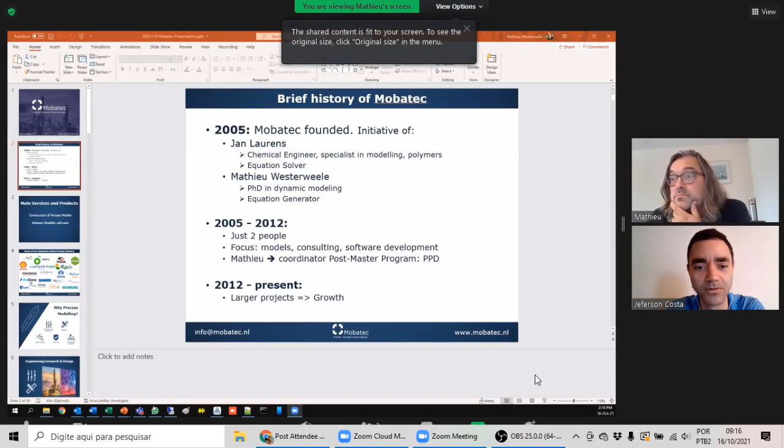It was very interesting because I received a question about my point of view on colorblind people getting a job as a chemical process engineer. It wasn't only one person, more than one person asked me the same week, so I decided to share something to see if I could help with that.

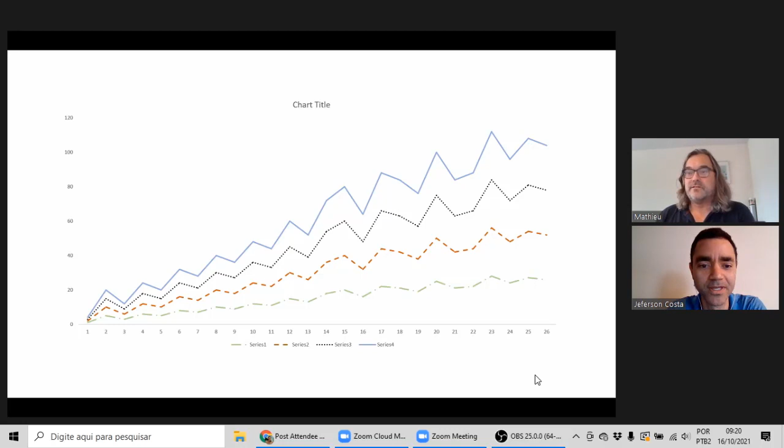How did it impact your studies and your career? No, hardly, because my study isn't about colors, and I didn't do any chromatography studies or something. I focused on process engineering, most of which is rather black and white, so to say. So it didn't impact that much, and when things with colors were concerned, I typically asked somebody else.

Also, people talk about navy green or whatever, all these additions - they make no sense to me. It's green or not.

I received some questions if it's possible to be a chemical process engineer having color blindness. You mentioned you did training for operators - did you notice that's something that should be important to a non-colorblind person when you did the training? How was it?

No, typically these operator training consoles already take care of that. I think people thought about these things, and there are real differences in colors. So I don't see any issues there, actually, because I did the training myself.

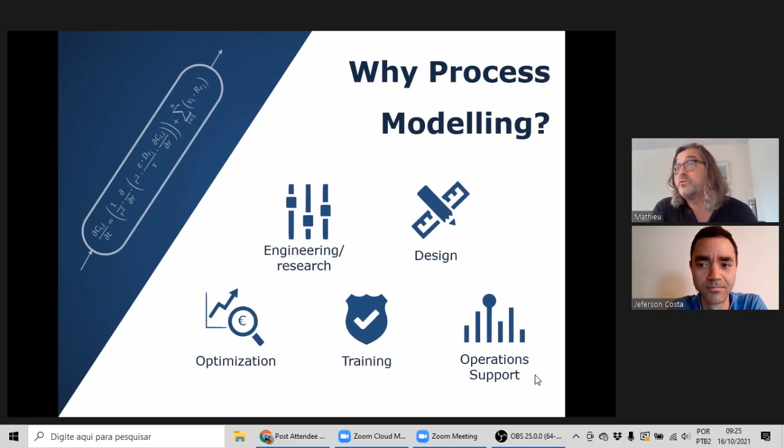In the beginning, we were actually focusing on engineering and research, because as I told you, we were only 2 people. So we worked a lot for companies called SABIC and DSM, which were very close by. At the moment we started, I actually lived quite close - it was 4 kilometers, so I could ride my bike to the company, which was great, and we could do some stuff there.

We typically did research modeling, so you took one unit operation and really zoomed into that, and you wanted to know all about it, expand your knowledge, improve the processes, and debug stuff.

Obviously you can also use it to optimize, so to reduce downtime or to make more product, or reduce cost, etc. These are typical things, engineers know that.

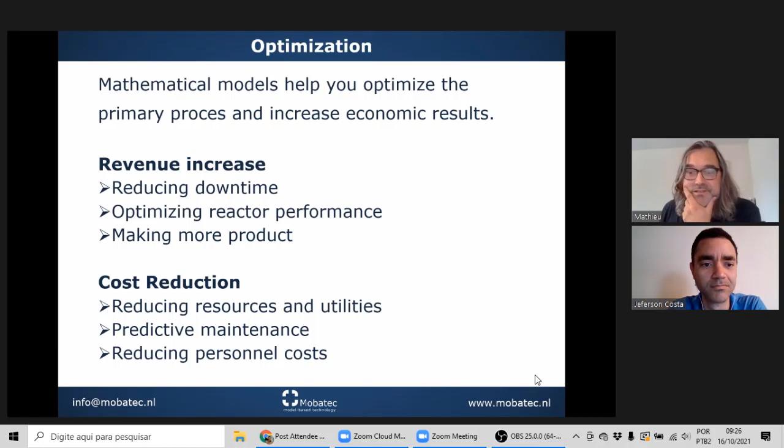Before we started, you asked me to give two examples, so I thought let's include a few which we did over the years. This one is nice.

These are examples for dynamic modeling, because at MOBATEC we focus really on dynamics, where time is also very important. Steady state simulators, there are a lot of them, and they started in the 1980s - you have Aspen HYSYS, which are combined nowadays, Pro2, Unisim, I don't know, there are a lot of those.

DWSim is a nice freeware one nowadays. I talk to this Daniel once in a while. Daniel is a Brazilian guy, very proud.

He's the Brazilian guy, but he hasn't been on your talk show yet, or has he? Not yet, not yet, he's the next one. But he's actually doing still a full-time job, so he does that all in his spare time. It's impressive what the guy did. Quite impressive, for sure, very impressive. But I think he focuses mainly on steady state modeling, though he does some dynamics at the moment as well. But well, that's nice, and I made my living out of it actually, which is also nice.

So this was one of the examples. I think it was already 7 or 8 years ago that we did this project. There was a company who had several processes in their plant, and one of the processes generated heat, about 24 megawatts, something like that.

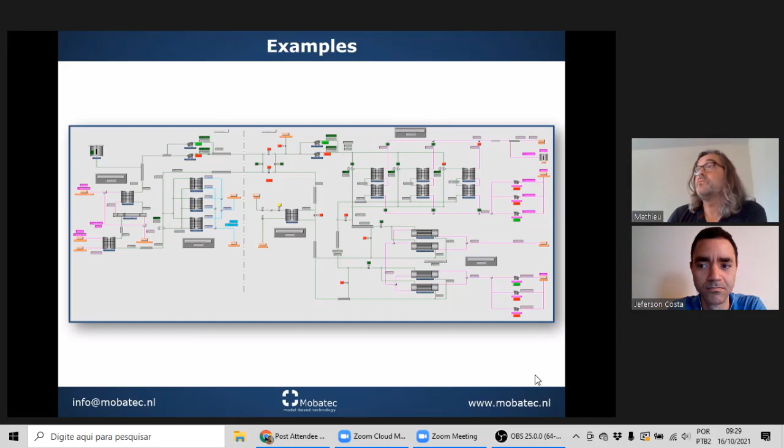So there were huge pipelines with 70 bar G steam. But at some point they thought, let's invest in our own steam boilers and put them on premise. The downside of that is that the distances are becoming a lot less. So if something goes wrong, the pressure in your steam headers will drop way faster.

So once again, steady state, everything is fine, but there are dynamic transition periods, and maybe during the transition your pressure drops so much that part of one plant will trip, and because that part trips, another part will trip, and then you get this whole series of things going wrong. They wanted to be sure that something like that would not happen.

So we built a big model for them with all the steam headers. This is the main picture. Actually, you could zoom in to the user plants, and there you could see all the equipment that uses steam, and you could turn off and on all of them.

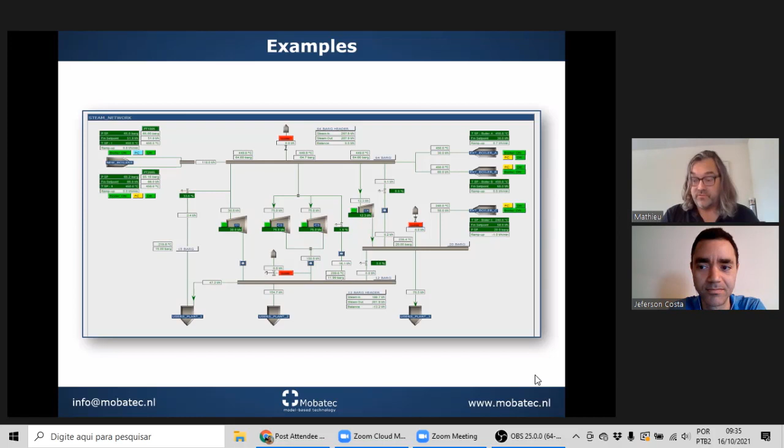It's a good bridge to our next part, because about 10 years ago we started doing more and more training simulators, especially because in the Netherlands most of the plants here were built 50 years ago, and in the beginning there were lots of disturbances and a very low degree of automation. As a result, the operators had a lot of hands-on experience, so they had to start and stop all the time, and they knew how their plant reacted.

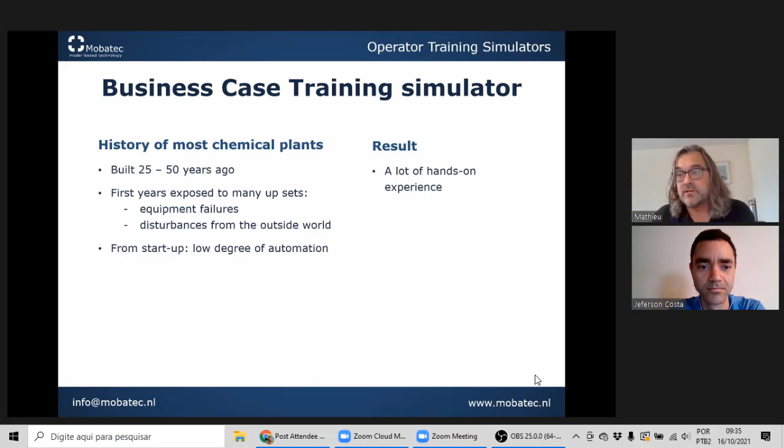But then smart people started doing smart stuff, and you get a lot of smart operations and less disturbances because there is a high degree of automation. It's not only process control, but very often also advanced process control. These are controllers controlling the controllers.

So in the end, several plants, also here in the Netherlands, run stable for 4 years. So the job of the operator sitting inside is, well, everything is running stable. That's fine. The problem is when something goes wrong, you don't know anymore how the thing is going to react dynamically and what you have to do.

So you need training. It's quite similar to the aviation industry. A plane goes from A to B, nothing happens.

99.99% of the time, it's all okay. But if something goes wrong, then you wish that your pilot has followed the simulator training in which he has trained how to handle the plane in this situation. And that's the same for operator training, and that's the business case we have.

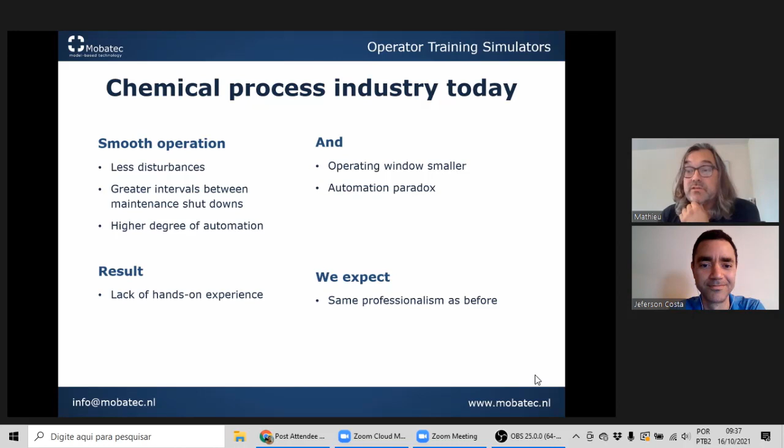So that's also brownfield, and you see that a lot for all the plants that have advanced process control, that they really want to train their new operators, because it's a problem, especially when the experienced operators are retiring. I've seen several times in the Netherlands that they actually need to call retired operators because they don't know how to start up the plant anymore. And because the experience has gone and left the company, you really need some training there.

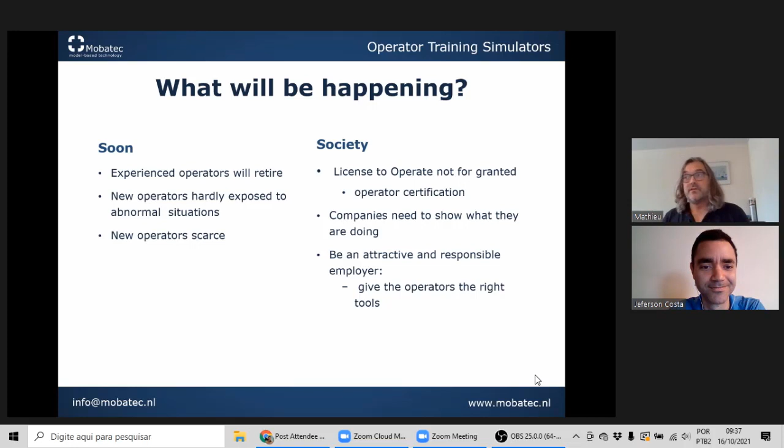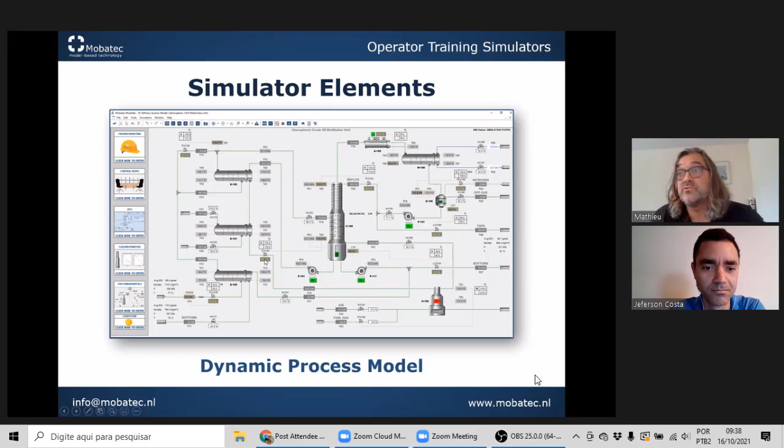So what we typically do is we take the P&IDs of our customer and we rebuild that, so this looks exactly like the P&ID they have. And it's typically a set of P&IDs that are all interconnected. The only difference is that it's now dynamic, so with your mouse you can turn off and on the pumps, and you can open and close valves, etc.

And then typically we connect this to a copy of the DCS, the control system. We have experience connecting this to Honeywell, to Yokogawa, to Emerson Delta V, to Schneider Electric, ABB, Siemens. So what you see here is a DCS of one of our customers, and these screens are from Emerson Delta V. In the real control room, they have 8 screens with Emerson Delta V, and this is the simulator room, also Emerson Delta V. So the look and feel for these guys is exactly the same as they would have in the control room.

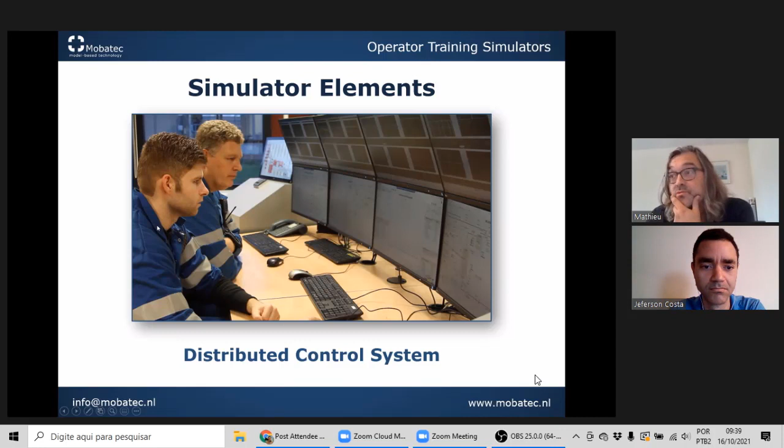And what you often also see in a control room are these annunciator panels, these hardwired panels with emergency buttons and maintenance overrides, etc. What we typically do is we take a photograph of those and put them on an LCD touchscreen. So if you push with your finger the button, you see visually the button going up and down, and the lights will start flashing, etc., as in the real plant. But we only need a photograph, so it's actually a cheap solution, but it does exactly the same thing, and it has the same typos as in the real plant, since it's a photograph.

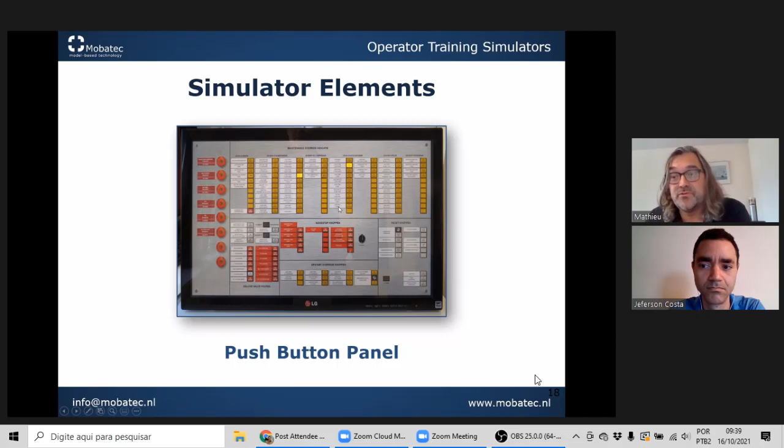And the only difference between an actual plant and the simulator is that we now also have an instructor panel. The instructor can load scenarios and let stuff go wrong and see how these people are reacting to that.

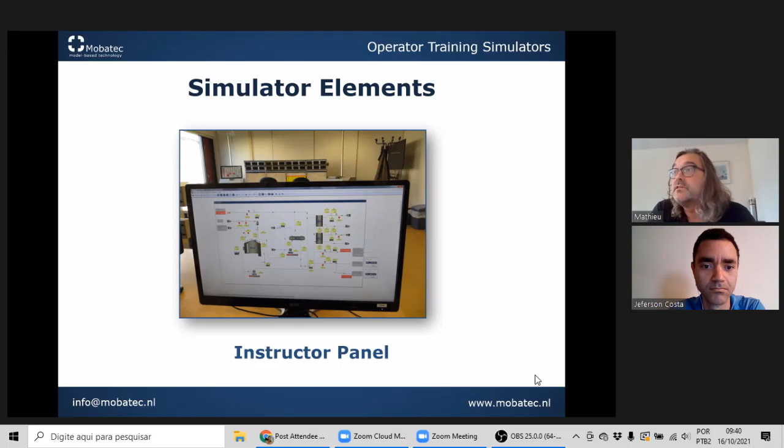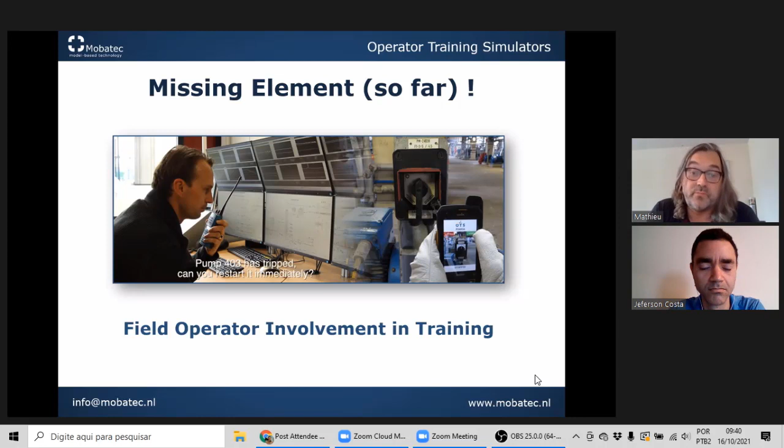So that's very nice, and then we made one extra step. There is one missing element in a training simulator, because a normal plant is operated not only in the control room, but also in the field. So you also need field operators who are operating stuff. But since we now have a virtual plant, you cannot walk in that. What you typically see is that the trainer pretends to be the field operator. So when these guys say, well, pump 403 needs to be started, he waits for a while and then clicks here on the button and the pump starts. But it's not really realistic, of course, and he can start a pump that is 750 meters down the line just 2 seconds later.

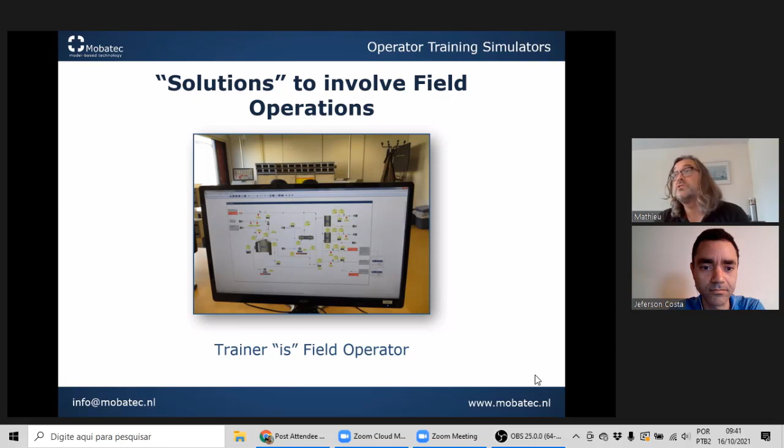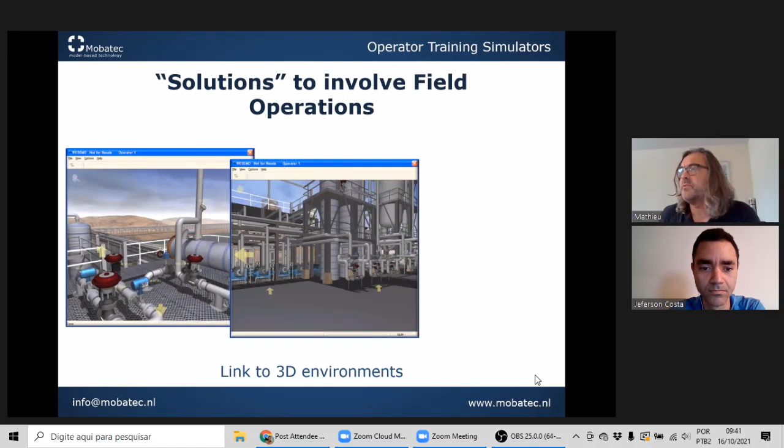So what you see now are these 3D environments. You can put on these virtual glasses, you maybe have seen it. It's really realistic nowadays and impressive, so you can walk virtually to a plant. But that's still a bit of serious gaming, and if you have these virtual glasses on your face for 3 hours because the training takes that long, that's a bit much for most people, and you get a bit dizzy after that.

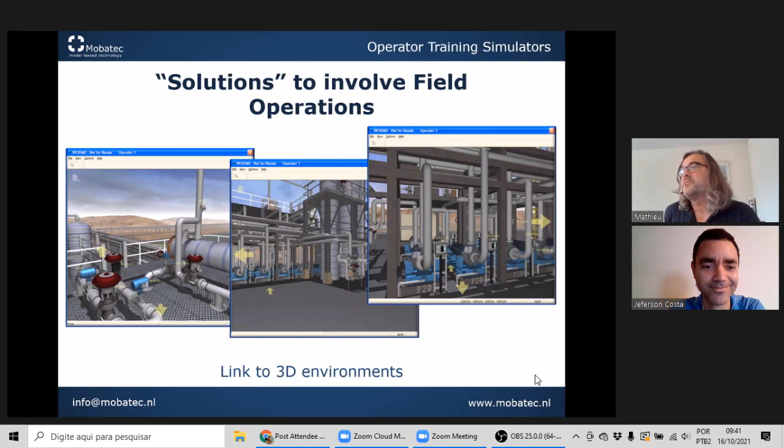We can even do that with photographs, by the way. So then if you click on the button, you zoom in, and you can click again, and then the next picture you see is that the valve is opened.

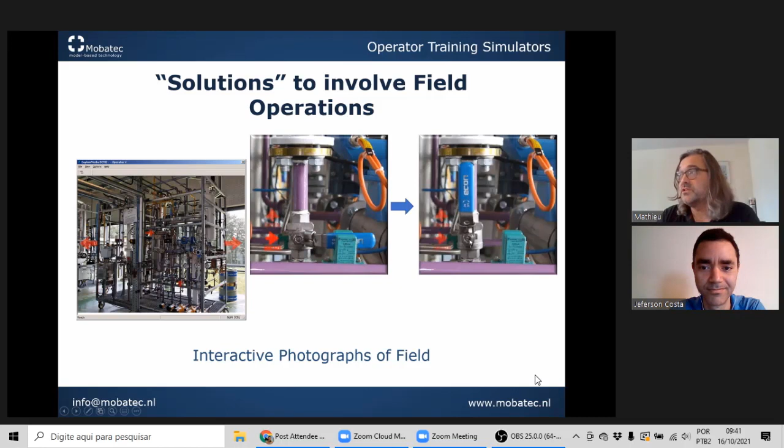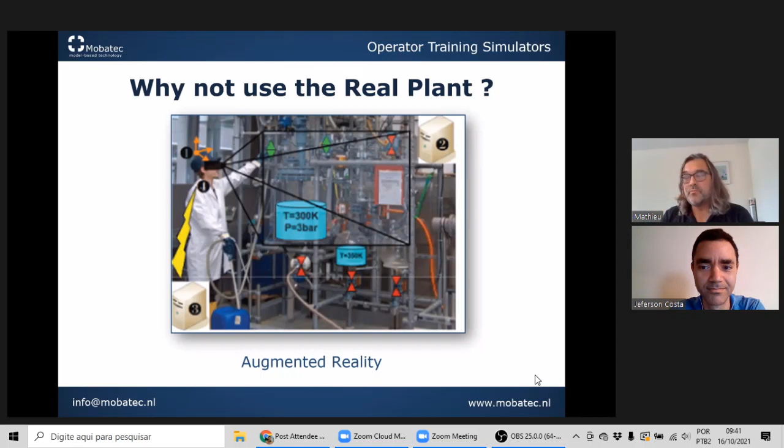But then we thought of something nice - why not use the real plant? Because we're doing brownfield projects, the plant is there, but the real plant is running steady, so you have to keep your fingers off. Still, you can use the location of the real plant for your training. So we came up with a nice solution.

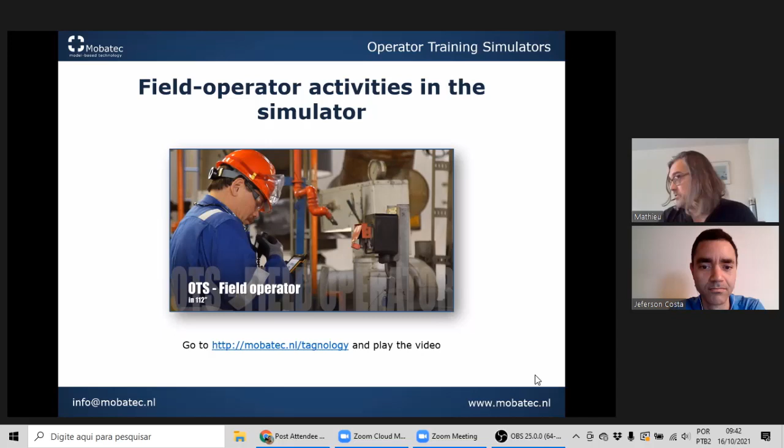So what we do is near the device that you want to operate, we hang these tags - you can see them, these are NFC tags. If you go there and scan them with your phone, which is an ATEX zone-proof, explosion-safe phone, a picture pops up of the device. When you click the device, it actually starts or stops the device, or opens or closes it in the simulator.

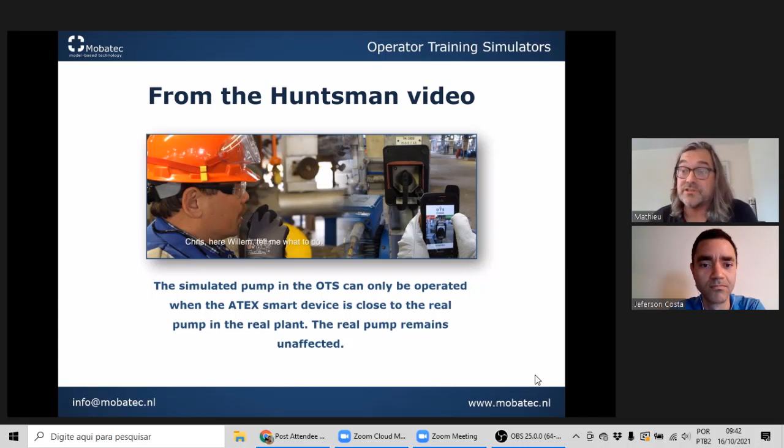But you really have to walk all the way up there, so you have the real noises, you have to wear your protective gear, you have to communicate with the guy in the simulated control room. So it's getting really, really real, because you're using the real plant and the real distances. And you can still open or close the wrong valve, of course, and then it still goes wrong. So you can test quite some things.

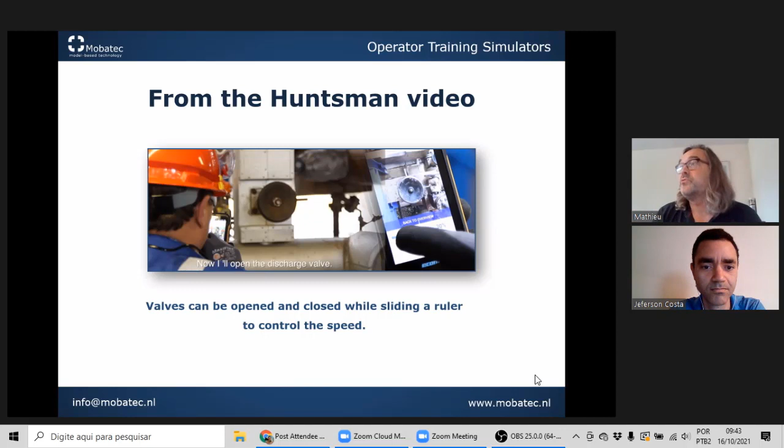We even made things like this, like a slider. So if you need to open a valve very slowly because it's a steam valve with high pressure, you don't want to open it in one go. You can do that with a slider, and you can control that.

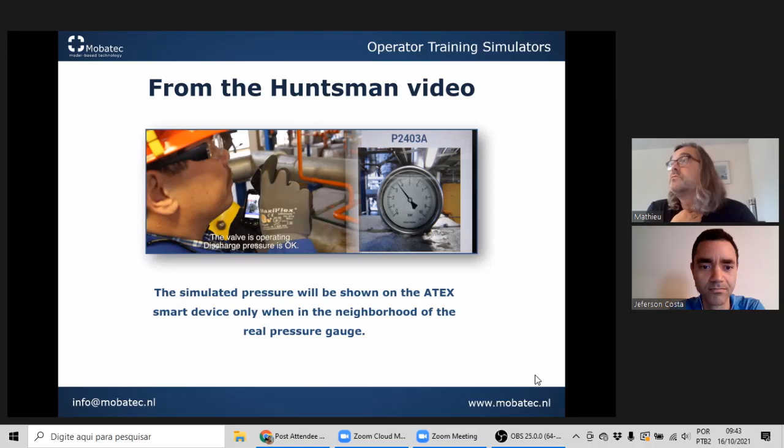Or if you have a local pressure indicator, you can hang a tag there and scan it with the phone and look at what the pressure would be in the situation that you're training right now. That's a very nice addition we made to make our training simulators even more realistic.

On top of that, we actually added even more stuff. So if you scan, you can also pop up questions. If you're near a pump and you scan the tag there, you get, for example, a question on the pump, and you can get some exams, etc. So it's not only modeling anymore - we're also into the learning, and it's a lot of fun to make these things and to see how they're used by our clients.

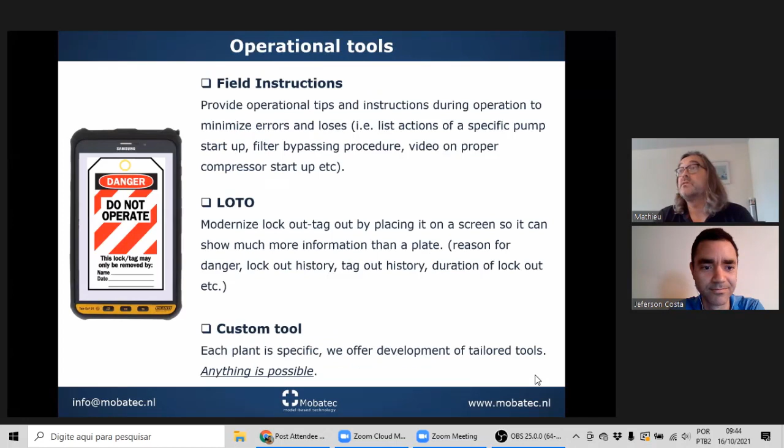I will skip through it a little bit. Or maybe one more thing.

This one is nice, actually we did it in a few plants. There are a lot of plants that have a lot of hand valves, and hand valves typically do not have any feedback to the control room. So in the control room, you have no clue if the valves are open or closed.

And if you want to wire those valves and put some information to the DCS system, well, it costs you easily $5,000 to $6,000 per valve. So if you have 1,000 of these valves, it's an investment of 5 million. Well, that's a bit much.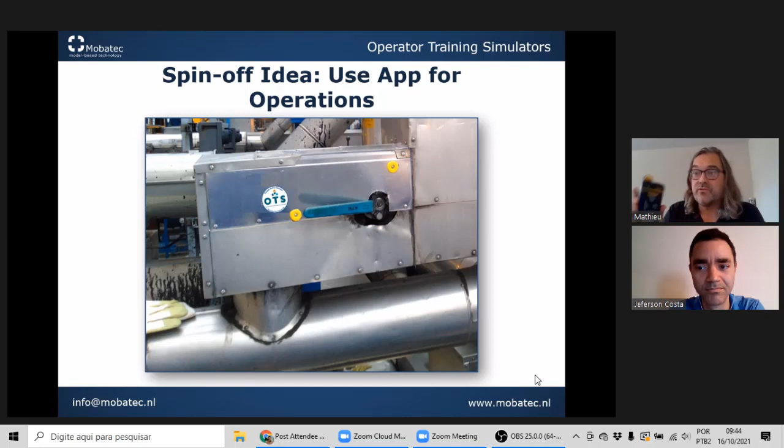So what you could do is hang these tags near the valve, and when you open or close them, you scan it with your phone. And in the control room, I have, for example, a copy of the P&ID, but now you color all the lines, thick or thin, if they're open or closed. So in one quick view, you can see them all.

Tank C has been lined up to this B pump. So if the operator calls you and says, well, I'm going to start pump A, you can say, no, let's not do it, and you can prevent problems, for example. So that's a nice addition that we made to our software.

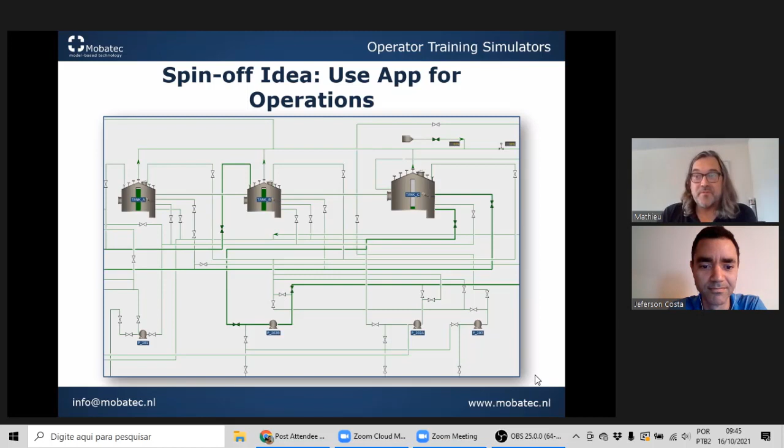And I see we love to show you a demo, eh? That's good, it will be very nice to see.

Very interesting. Yeah. So if you have some questions in between, feel free to ask them. And I see that it's tailor-made for each client, right? Yes, typically we do that.

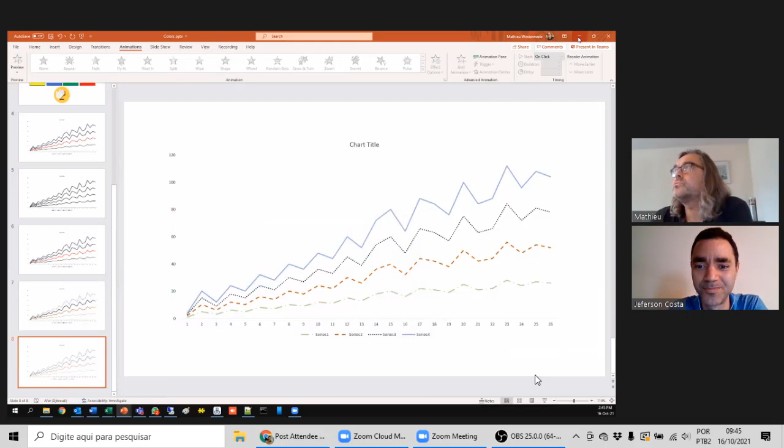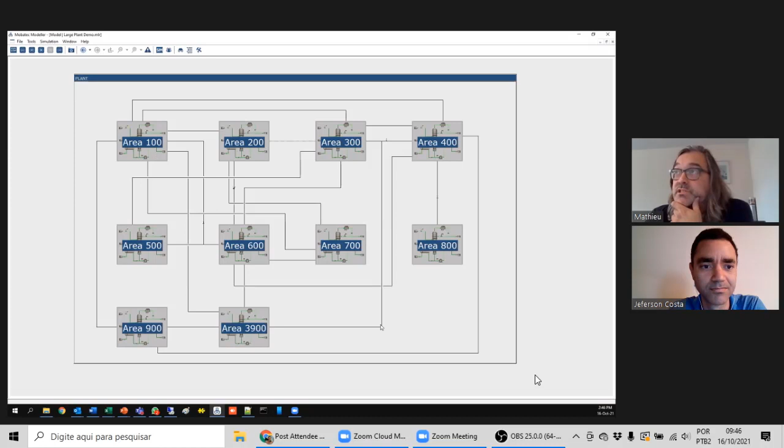Okay, maybe it's good to show you this example because I preloaded it. This is because we can make huge models, actually. The examples I just showed you are quite small, but this is, for example, a big plant, and the plant consists of 10 areas. If you click on one of the areas, you see that it consists of a lot of P&IDs. And if you zoom into the P&ID, you see well, this is typically how their P&ID looks, but now it's dynamic.

So I can now press run, and now the calculation starts. And I can, for example, stop the pump. And the pump is not running, so you will see that the level will surely start rising.

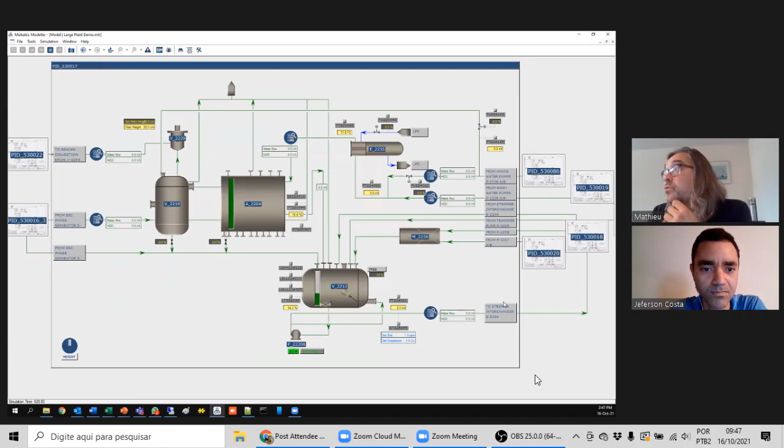so the gas pressure rises, and you will feel that in the rest of the plant. You can walk through the whole plant, and it responds very quickly, and you can interact with it.

And this is typically the interface that we give to our trainer. So he has access to all the valves, hand valves, and all the pumps, etc.

And this is then connected to a copy of the control system, and that can be either a real control system, like Honeywell or Emerson or Yokogawa software, or we can actually mimic it ourselves. I can show a quick example of that too in a minute. So then we rebuild the screens, and they look exactly the same, but you don't have to buy an extra license of expensive DCS software. So that's how it works.

And maybe this is also a nice point to show you the difference between different kinds of software, because that was one of your questions. What's the difference between, say, Aspen or Unisim and MOBATEC?

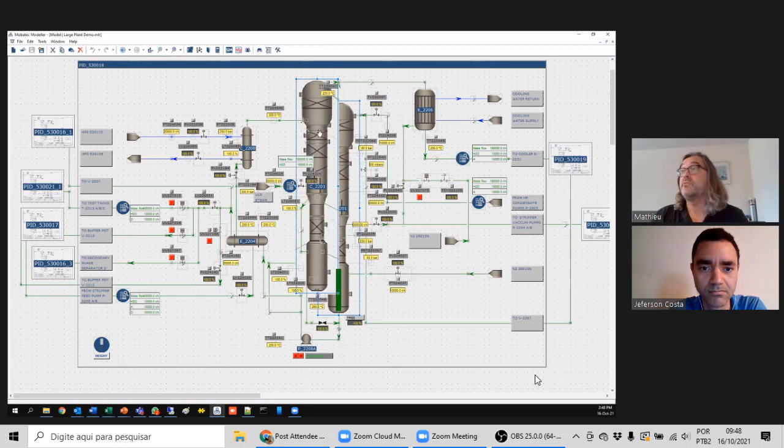So this is our runtime environment. You can click on this thing, but nothing will happen. But you can also shift to our debugging environment, and then you can get all kinds of data. I won't show it now. And you can even go further and go to our modeling environment, and then you can drag and drop, add stuff, and completely model everything.

So maybe this is a nice one. I will go here. So for example, this is a very non-typical column. So what we do is we build a lot of non-typical plants. It's not that we have a standard library and drag, drop, and finished. No, we like to do stuff that has not been done before.

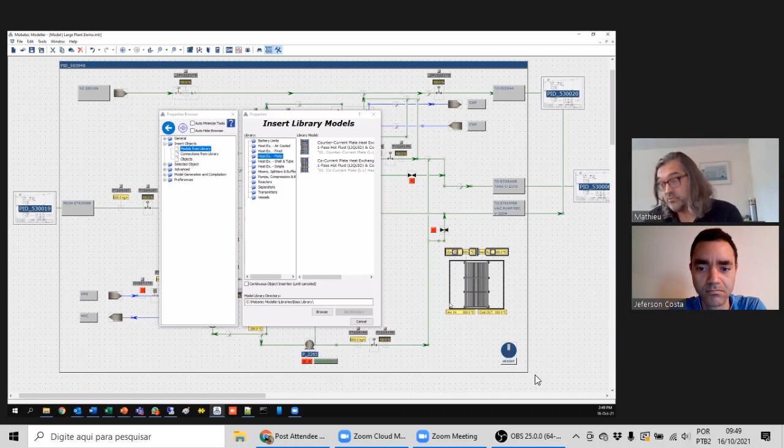So there are typically two ways of modeling in the world. One of them is called flow sheeting. What you do then is you go to your library and get, I don't know, a plate heat exchanger, and you add it and connect it to your screen. That's one way. Another way would be equation-based modeling, where you type out all the equations. With flow sheeting, somebody else has built the model, tested it, tuned it, debugged it, and you only have to put in some parameters.

If you do equation-based modeling, you type out everything yourself, and it's a lot of work, but you can make anything. With flow sheeting, if you don't agree with how it's modeled, there's no way to change it. So it's either that or nothing.

So to give you an impression, I can select this. We can go to our tools and say model generation, show me the code that's behind this. And then you will see an enormous listing, which is the code that's being computed when I model this. But that's quite hard, because these are thousands of lines.

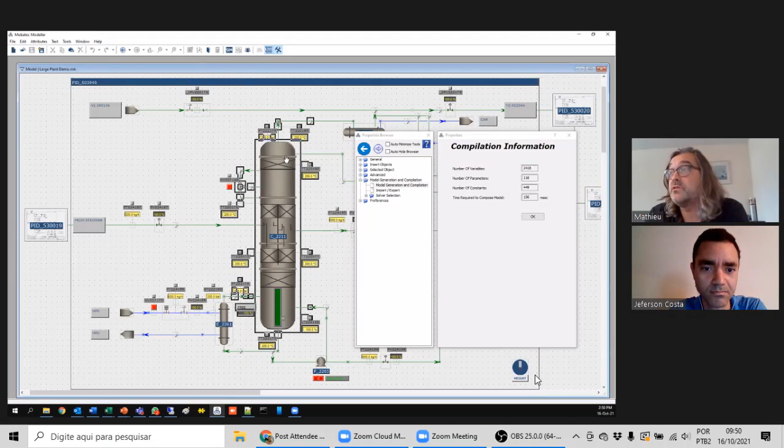So what we have built is the best of both worlds, so to say. We can now double click on this one, and then you actually zoom in to the details, and see how this column is set up internally. And we can zoom in even further.

So let's take, for example, the bottom section. And then you see that there is a liquid phase. It's communicating with a gas phase. The red lines are heat, so there's heat loss to metal, and there's a heat loss to the environment. And it's on this level that you can define your equations.

And this is actually also our modeling methodology. In our methodology, you can divide any unit operation into systems and connections. Systems represent capacity, they can store mass and energy. And connections represent the transfer of mass and energy between the systems. So that's very simple, eh? That's in 2 seconds my 5-year PhD thesis explained. But that's a bit how it works.

But the nice thing is, if you now click on this one, for example, you can go to equations, and you see here the equation.

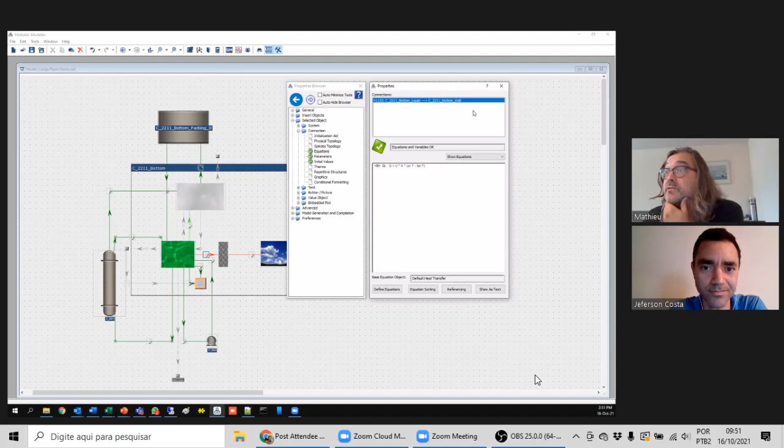For example, it's the heat transfer, it's transfer coefficients times area times difference in temperature, which is a very universal one. And what you see here is a very simple solution we took. You have the enthalpy balance, which says the heat in minus the heat out.

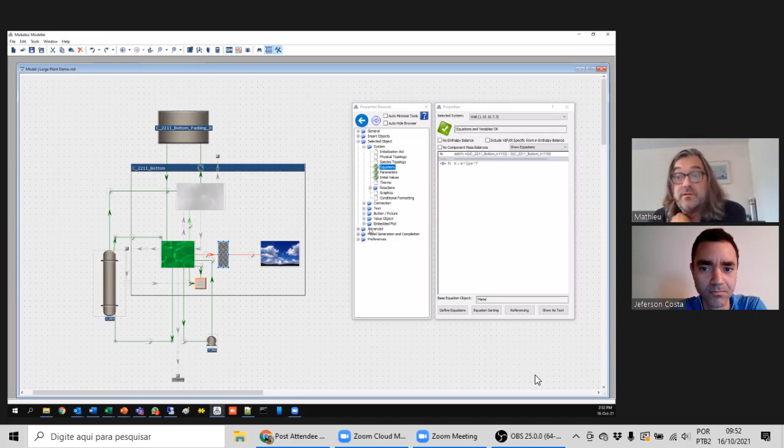The nice thing about the program MOBATEC Modeler is that it sets up the energy and mass balances automatically. So if I make a change here, say I don't want heat loss, I just kill it, and the balance adjusts like that. If I press undo, it's back. Or if I say this is actually wrong, it needs to come from here, then all the balance equations are adapted and your model is still valid.

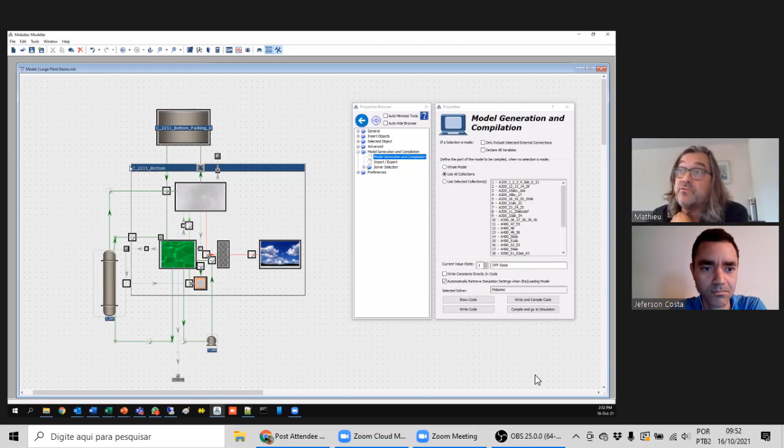And then you can select the part you want to model or compile, just press compile and go to simulation, and code is made for the part you selected. You can test, tune, debug, and improve it.

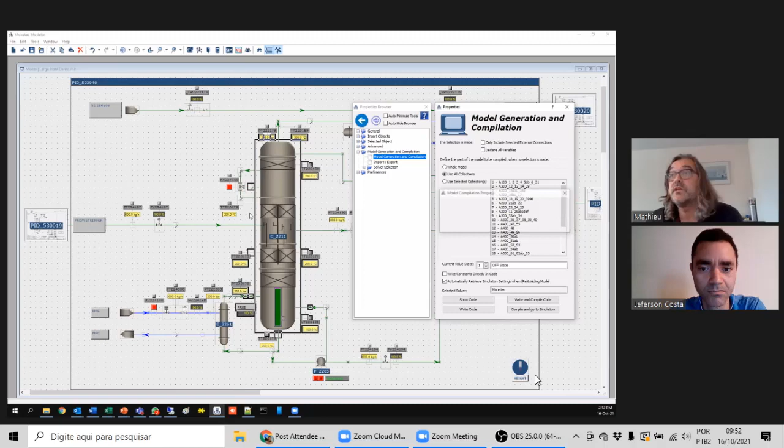If I wanted to make this little change in the code using equation-based modeling and work like this, it's quite difficult, because I'd have to take something out here and maybe add something there. It's very error-prone, and debugging is a lot more work in that case.

So that's how we do modeling. Quite impressive, very, very nice.

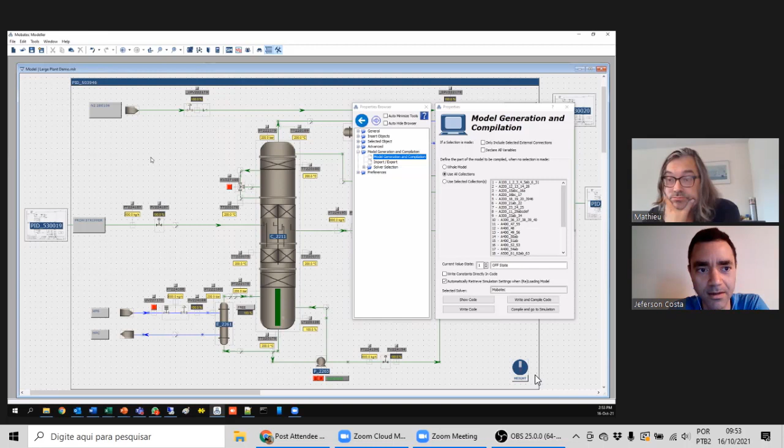You deliver tailored models for your clients, but you mentioned it's also possible for the engineer to build their own model. How do they learn to use MOBATEC? We typically have some courses for that. We start out simple, and then we take them hand by hand to make it more complex and more complex.

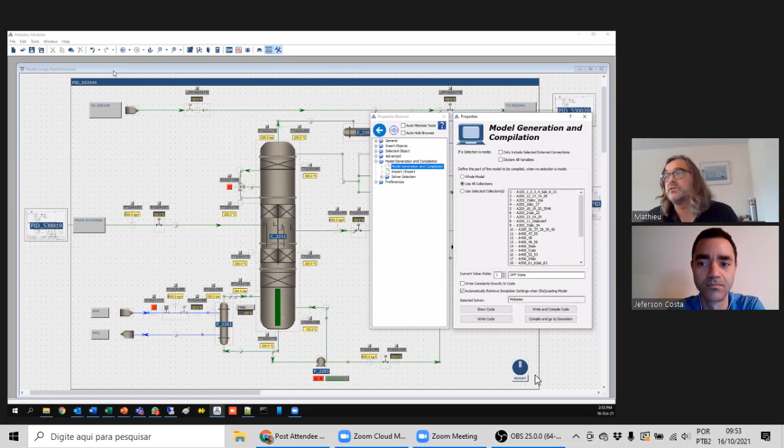Because simple things are easy also in our tool. If I want an extra pump, I just select the pump and put a new one here, press copy, and well, I have to reshape some stuff, but then I have my extra pump.

And we also have a library actually. So if I close this one and open a new library, I can say let's insert some objects here. You can make a model very quickly like this.

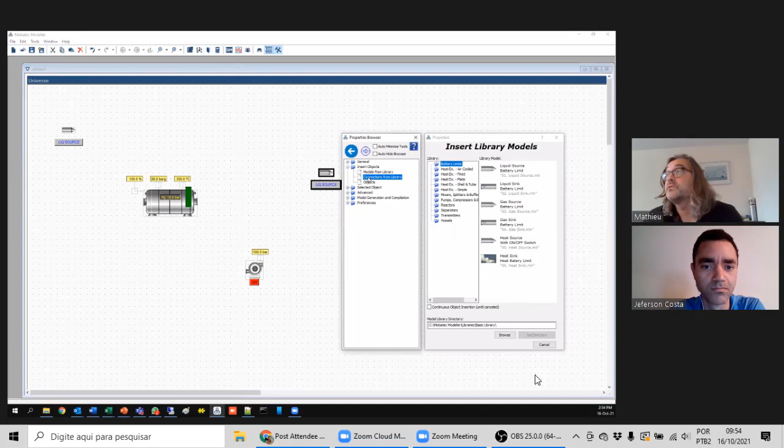But this is close to flow sheet modeling. So I can take a pump, put it here, add a battery limit, and make some connections. I'll do it continuously, put it here.

So we can build a model from scratch quite quickly, you see.

And then we have built some easy stuff, so you can click here and even go to a pump curve editor and say this is my pump curve, and apply it. But then you're actually skipping the whole idea of equation-based modeling.

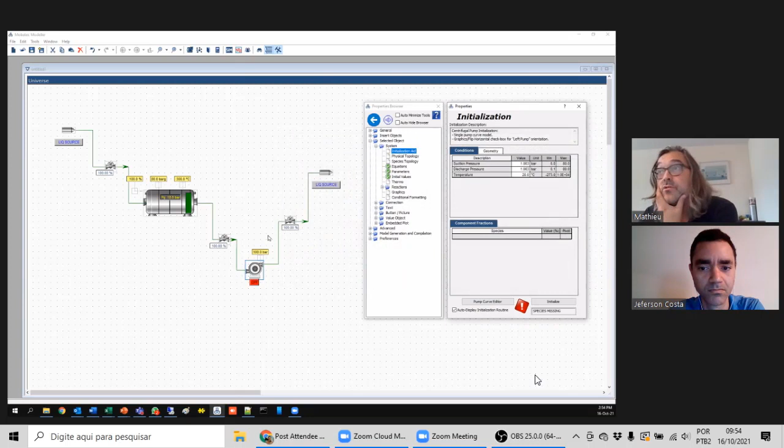So what you can also do is have a look inside. I can click here and go to refine, and then I see how this model is built. I can click here and see which equations are used, and I can even adapt those equations from a model database.

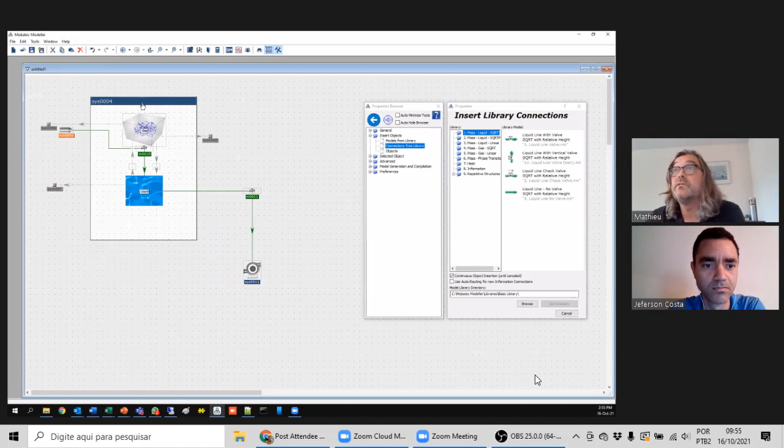The tough work, what we learn, the tough work is when you need to build equipment that is not in the library, right? Yes, then it takes some work, of course.

And that's what we love to do, of course, to build stuff that's not in the library, or to make it different, because sometimes it is in the library, but you don't agree with the equations used, or you want to extend it. And you can build it completely from scratch.

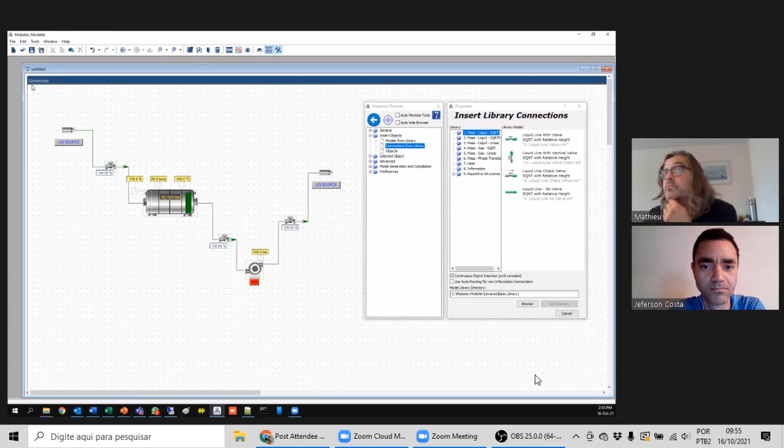You can, well, make another one. So I can go to objects and say let's just insert a system, and another one, and in between put a heat connection.

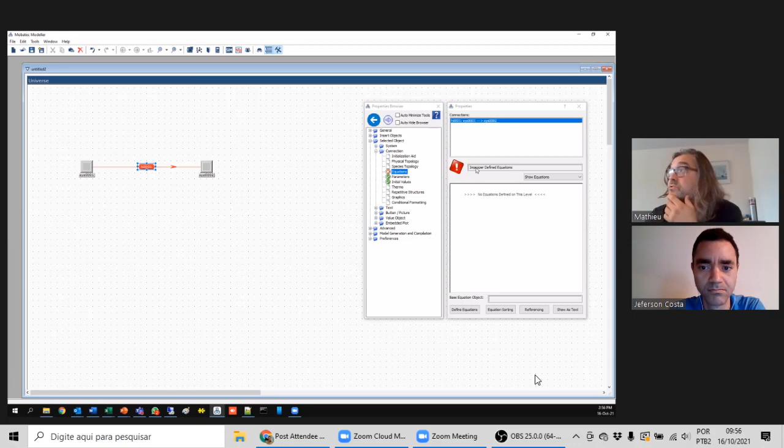So then you are already helped. If I click here and go to equations, it says oh, something is not right, it's improper. So then you zoom into the details and it says well, this is a heat connection, I need heat. What do you want to do? And I can select it, then it's a constant, and it says okay, that's good.

And then I can give it a value, say 50 joules per second, or you can even browse here, megawatts, kilowatts. But you can also say that's not smart, the heat is not fixed, so let's not do that. Let's select an equation maybe from our default database. So I can do this one you just saw.

Heat transfer is the transfer coefficient times area times difference in temperature. But then you have a problem: there's one equation, but three unknowns. You can choose to add more equations, or do you have an equation for the heat transfer coefficient? Or you just choose it as a constant, and then it says, okay, now I can calculate.

Then you automatically come to the next problem because it refers to an origin and a target. So it takes the temperature of the origin. If I click here on the origin, it says, okay, I need temperature. Do you want to give me a relation that relates back to enthalpy, or is it fixed?

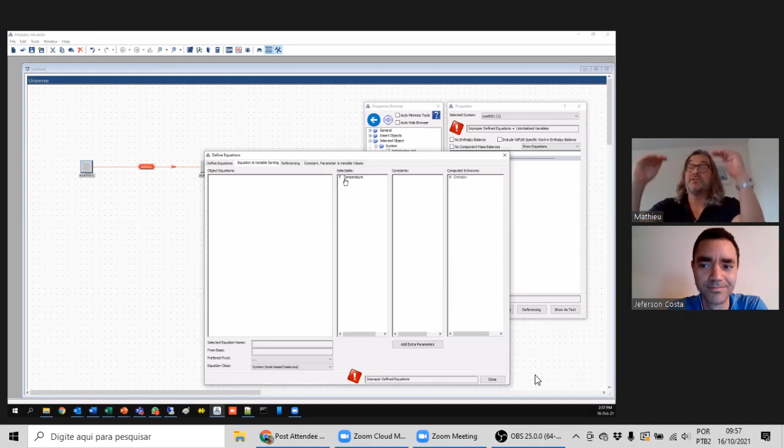That's the whole way you set up your model step by step, and it's very clear what kind of assumptions you make. In the end, it generates some code. So if I just choose this as a constant, and here choose it as a constant too, I can fill in some parameters.

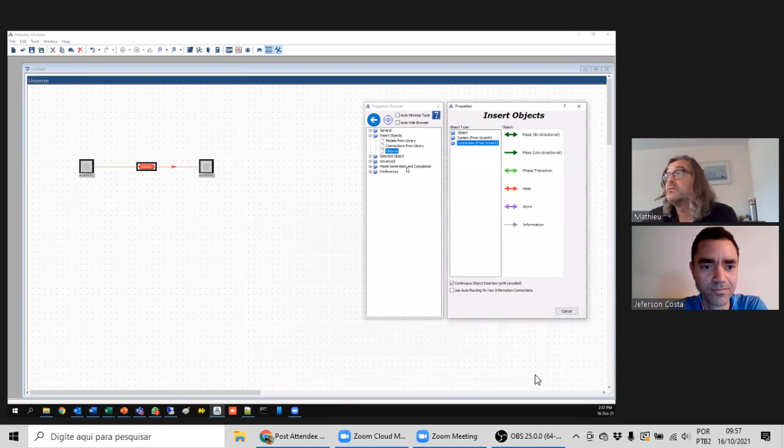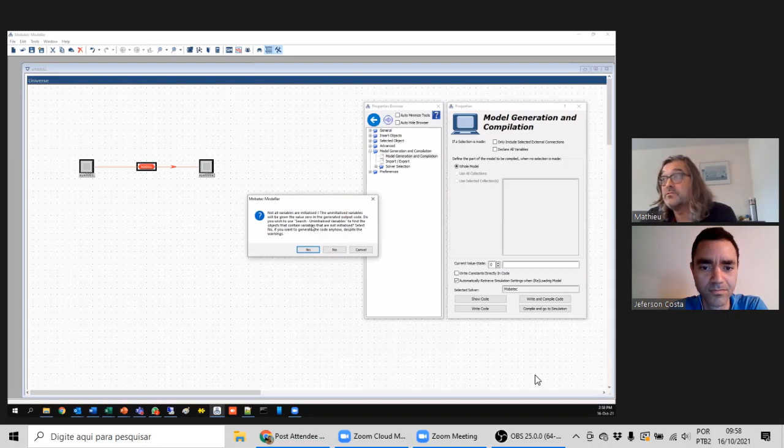And then you can generate your code actually, and it will complain all the way. If I generate the code now, it will say probably a selection is made, okay, then not all variables are initialized, do you want to search them? You click yes, and then you can zoom into all the parts that need your attention. So it really guides you step by step to set up your model.

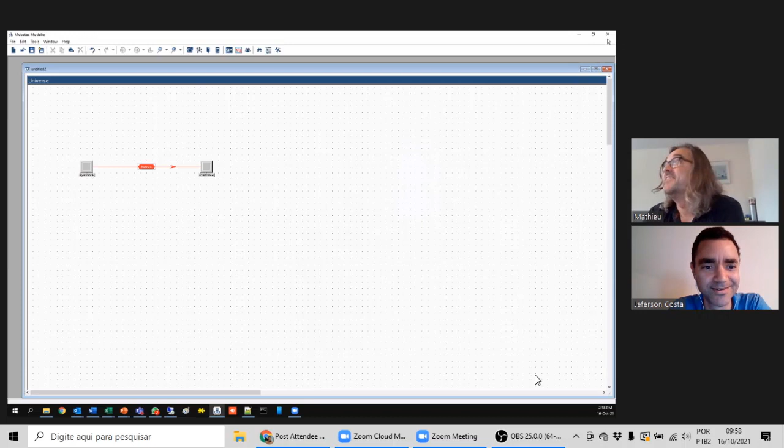And it's real equation-based modeling, and in the end you can make beautiful applications, of course. You can connect that with PLC. Yes, also - oh wait, I closed it too far, sorry.

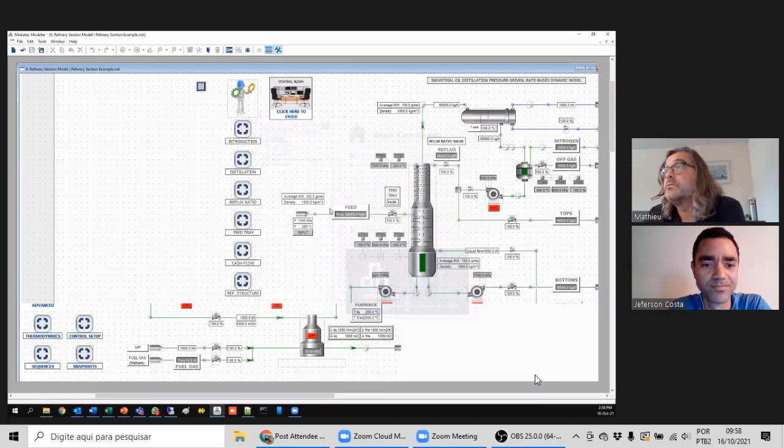We can connect with all kinds of external software, and we can also make it look nice. Let's have a look at this one, the refinery example. So if you look at this one, you can compile this one, and then it looks like this.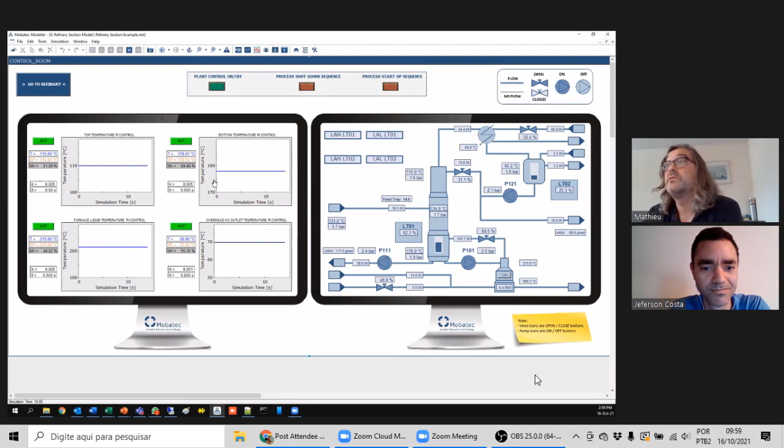But you can also - we made for this one, for example, a little control room, so you can even draw up all this in our tool. That looks very nice. You can start and stop, and then it becomes dynamic. We can even make this into a learning module.

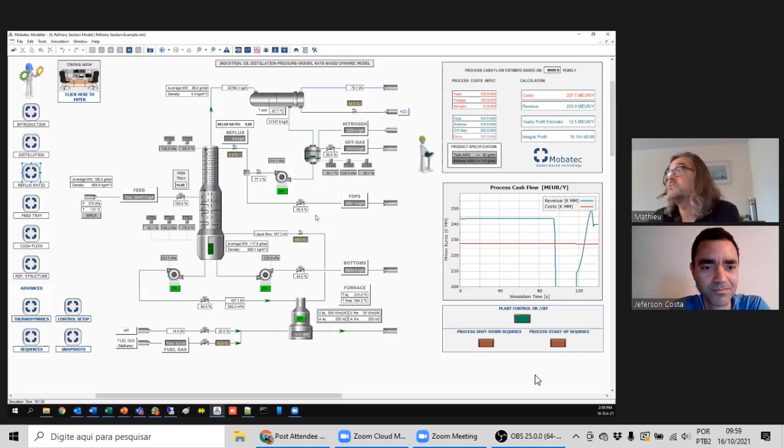So, distillation - what is that? If you want to learn more about it, next, or what is the reflux ratio - you could put all the information you want in there. But now I can also start and stop the pump. It's all dynamic, so I can also change valve positions, you see, and then everything reacts.

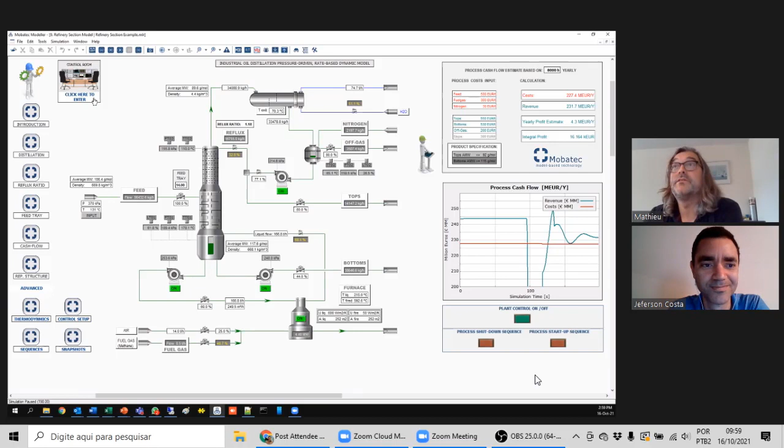Very nice. Yeah, so we can make quite nice examples in this one. Maybe I think this one is nice actually.

Wait, I quickly start over because I need to start something else, this one, because then I can show you where is MoBaTec plant.

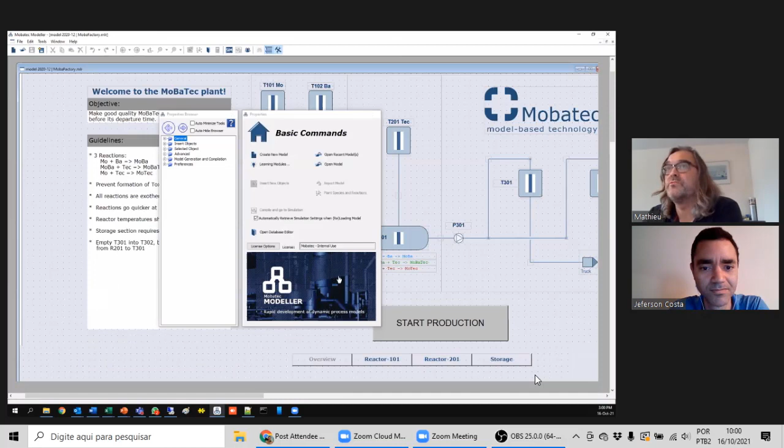When we go to conventions or something, we always show people this one. They can play with our tools themselves. And that's a nice one because it's a combination of a DCS-like interface, and so I can start production and play with faceplates, etc.

Open, close. And what we also have is a storage part, and there you see hand valves, but I cannot operate them. So I have to go to the so-called field, and that is what we mimic, where we have a board with tags, and then you bring your phone and scan it.

And if you scan it with your phone, you get a picture. And I can actually press open on the valve, and then it will open in the field. But you don't see it, because in the real plant there's also no feedback, so you don't see it open. But there is feedback with the pump.

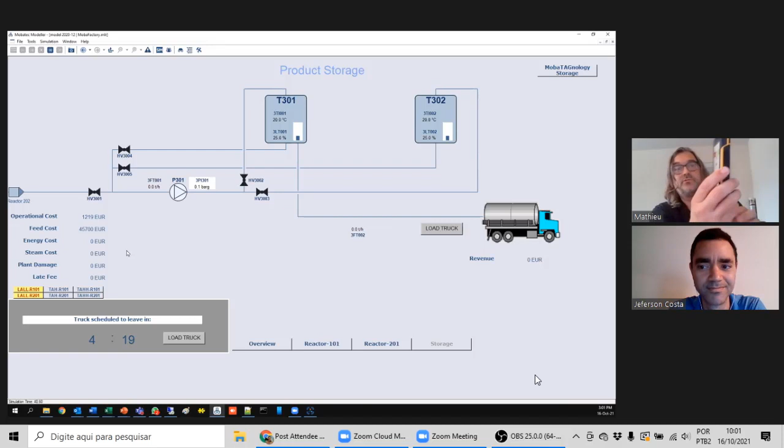So this is another tag, and I connected it to the pump. So if I scan this, you see the pump image, you see? So if I now press start, you will see the coloring of this one automatically going on. Press start - whoop, now it's on. See?

So I can stop the pump in the control room, but not start it. But I can start it with this one again. So, start.

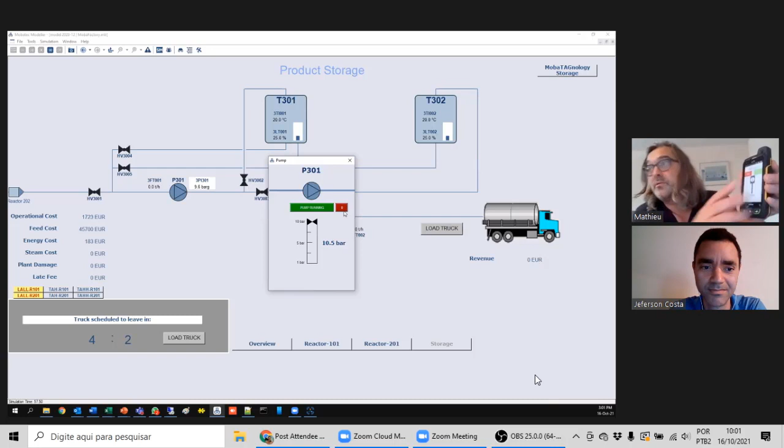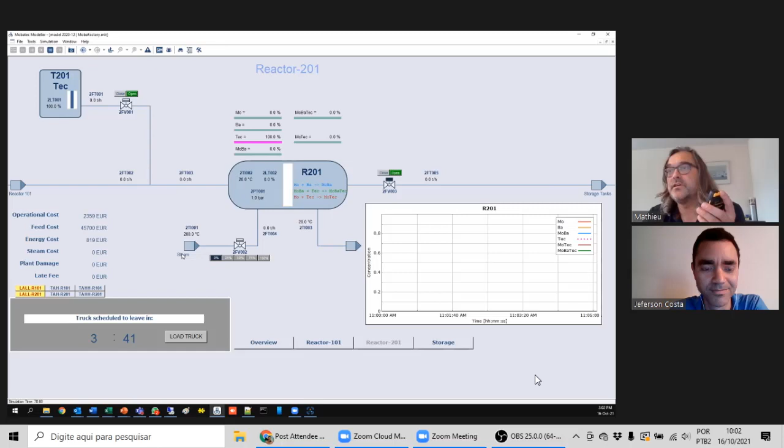That's nice to play with, of course. And we give it as a demo. So we put some images like this, and we put it in the next room. And then somebody is playing the control room operator, and he has to steer the field operator to open and close the correct valves, and then they have to finish it in 5 minutes before the trucks want to leave.

Anyway, if you press load truck, then it loads all the stuff, and you see how much money you made or lost. Now we made bad product, of course, so you lose money, and then it drives away. You see.

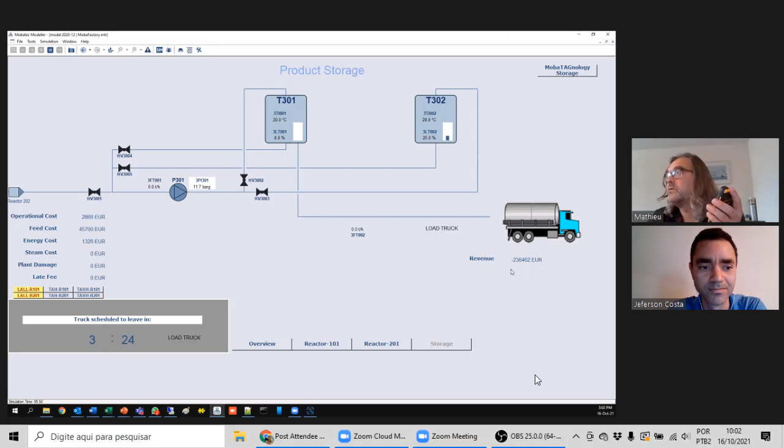Very detailist. Very detailist.

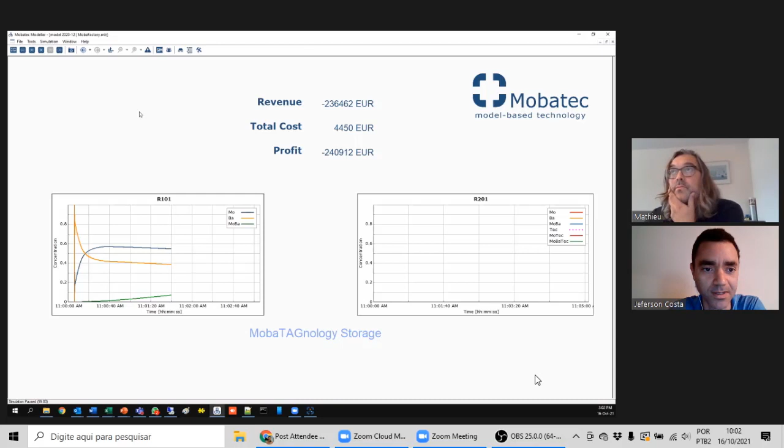The MOBATEC is used for sure for dynamics, but it is also possible to use in SteadyState. Yes, we have a solver for that. So if you close this one again, all right.

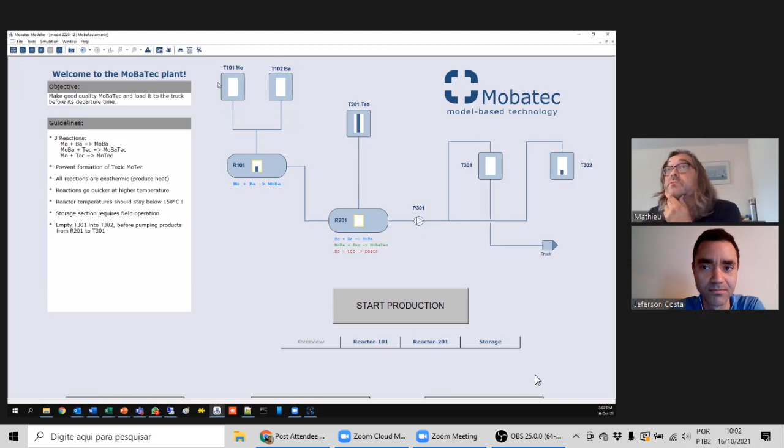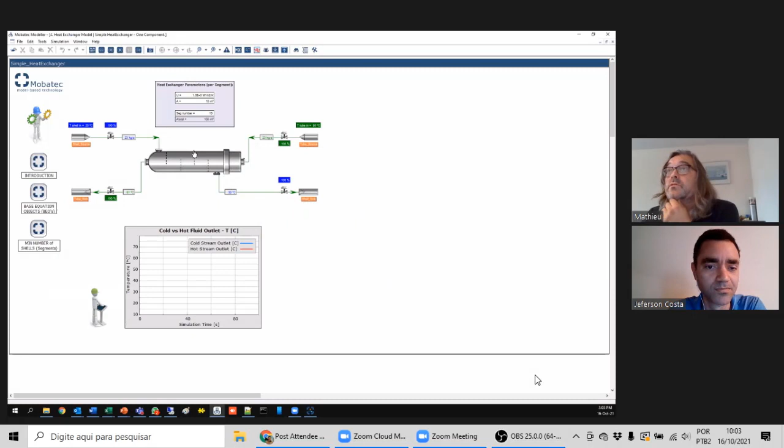I can go to example models. This one is maybe nice. So this is a simple heat exchanger example. But I have to quickly compile it. So if you just press run, then it goes dynamic. You see it, and you can change the valve position. You see dynamic stuff going on.

But I can also put our solver into steady state with an adaptive step. And I just press perform run and bam, I have the results. I put this back, and then I press zoop. So you can also solve steady state and get your results immediately.

And we made a link to Excel, for example, and then you can control your whole modeling environment via Excel.

Mathieu, one of the challenges for medium to small companies for using process simulation is the fee asked for a year. Sometimes we need to have a contract of 3 to 5 years. And in this way, MOBATEC, not talking about numbers but talking about feelings, could you say that it's more competitive than others, HYSYS or other stuff?

Yeah, way more competitive. I think it's in the order of magnitude of a factor between 5 and 10, actually, that it's cheaper. And we have quite some options, we can do a perpetual license, we can do yearly or 3 monthly. And we even have, for people who don't use modeling that much, the 100-hour license, so you can model for 100 hours.

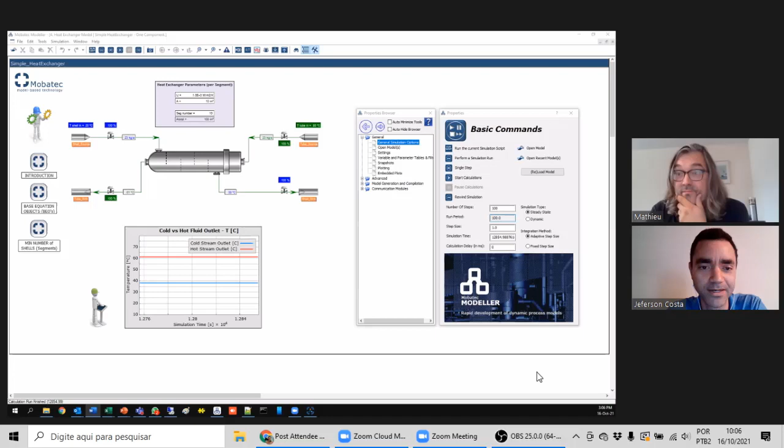Very interesting solution, and very nice solution for sure. And guys, it's an alternative for commercial software, because as you can see, it's very intuitive, and of course the management sees the price, right? We know that process modeling or process simulation in many cases is very useful for chemical engineering tasks and work, but sometimes the price is prohibitive for many companies, and maybe MOBATEC is an alternative, a very good alternative.

Could be. Well, yeah, but it's a little... We are not aiming at the steady state simulation stuff. For that case, our library is a bit small, I think, and it's maybe also a little bit more work, because dynamic modeling is just more work than steady state modeling. It's just a fact.

But we can also do steady state modeling. But if you are only interested in plant design, for example, then I'm not sure if we are the right fit. We probably can do it, but it's not our line of work typically.

Okay, well, you have to know what you're good at, eh? So that's best. I like to work in a niche, which is new, and then become really good at that. That's also the most fun, and it's important to have a lot of fun in your work. Yes, for sure. And I can see that you love what you do. It's very, very nice when I get in touch with people that love what they do, because it's not a cliche.